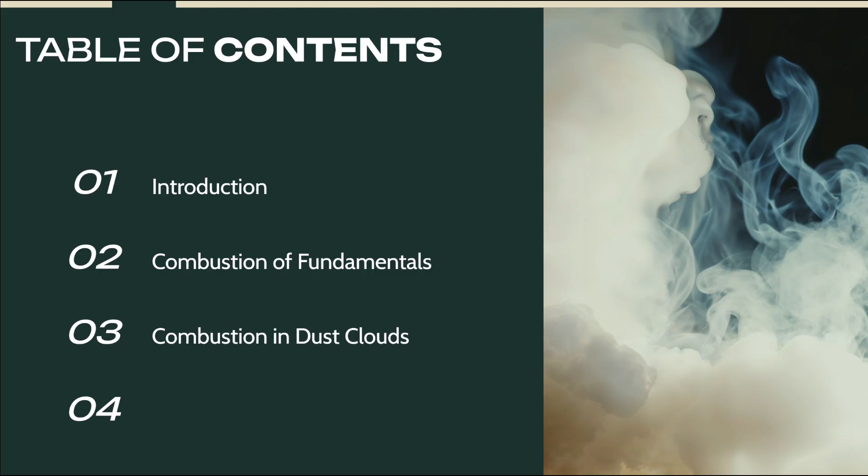Fine powders, also known as combustible dusts, can ignite or even explode when dispersed in air under the right conditions. These risks arise because fine particles have a large surface area relative to their volume, allowing them to react rapidly with oxygen. Dust explosions have caused serious property damage and loss of life across various industries such as food processing, metal fabrication, and chemical manufacturing. Understanding these risks is essential for engineers to ensure safe plant design, hazard prevention, and worker protection.

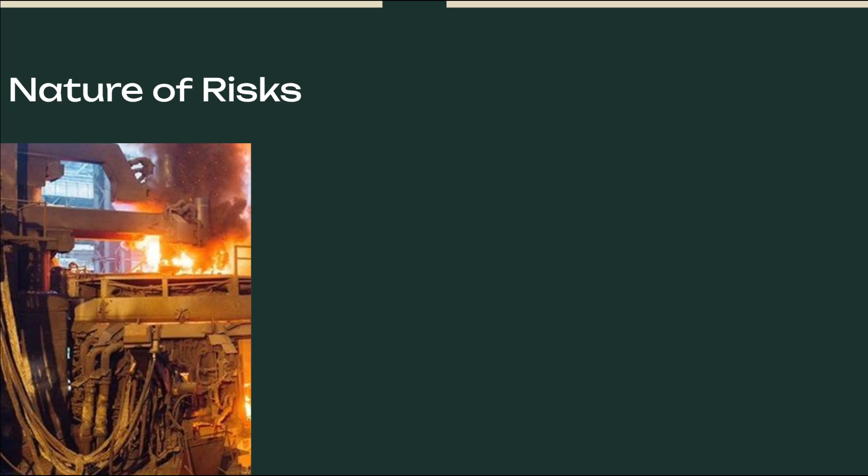The hazards presented by fine powders can be classified into two main risks. Fire, when fine powders can easily ignite because of their large surface area, which allows rapid oxidation when exposed to air. Even a small spark, hot surface, or static discharge can start a fire once the dust is heated above its ignition temperature.

Explosion, when combustible dust becomes suspended in air at the right concentration, it can form a flammable cloud. If ignited, the burning particles release heat and pressure rapidly, leading to a dust explosion that can cause severe damage and secondary blasts.

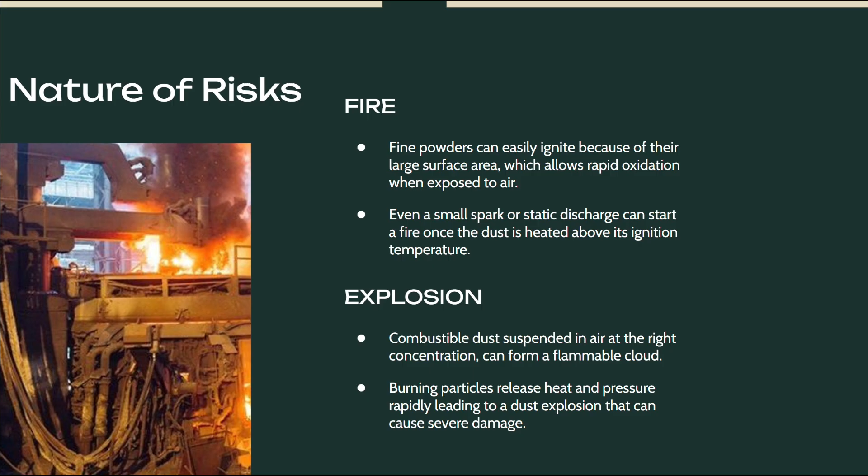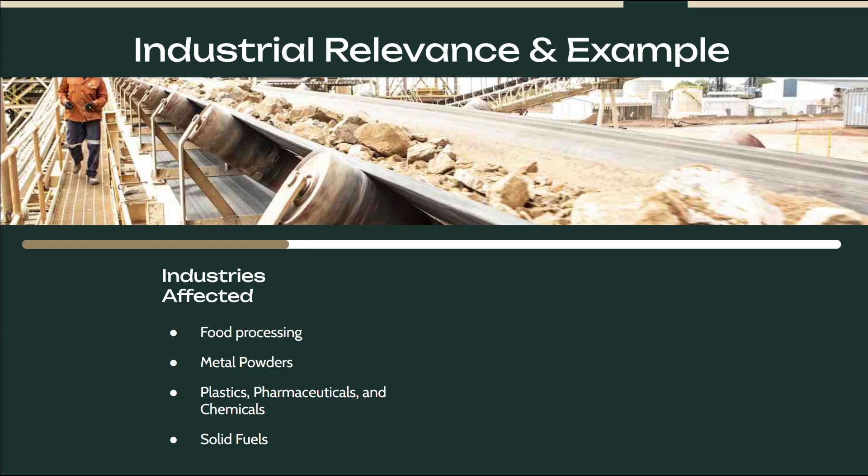Fine powders are commonly handled in many industrial sectors, including food processing such as flour, sugar, and grain handling, metal processing involving aluminum or magnesium powders, plastics and pharmaceutical industries, and energy and chemical plants handling coal or biomass. These processes often involve grinding, drying, conveying, and packaging, which can generate dust clouds and increase explosion potential.

Common ignition sources and equipment include storage silos, dryers, and dust collection systems, conveyor belts, bucket elevators, and mills, and hot surfaces, friction, or electrostatic discharges from machinery. If not properly controlled, these systems can easily create conditions that can lead to ignition and combustion.

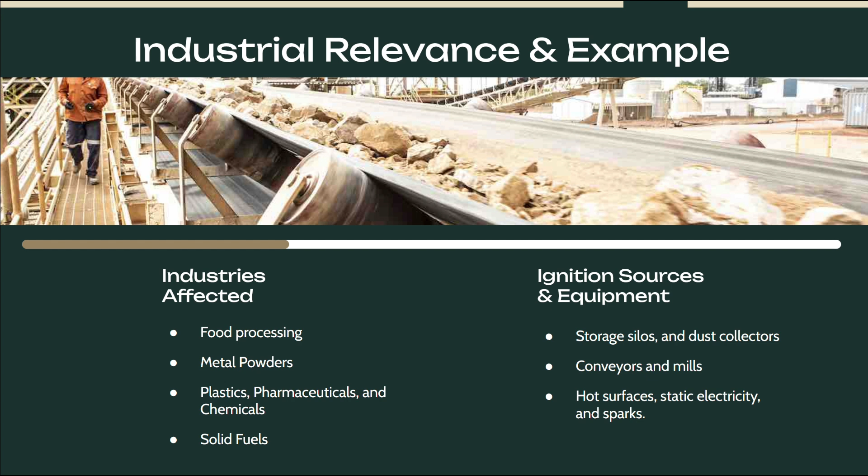A well-documented example is the Imperial Sugar Company explosion in Port Wentworth, Georgia, USA in 2008. In this incident, fine sugar dust accumulated on floors, equipment, and overhead surfaces. When the dust inside an enclosed conveyor came into contact with an overheated bearing, it ignited and caused a primary explosion. This initial blast disturbed more settled dust throughout the facility, leading to massive secondary explosions that destroyed much of the plant. The disaster resulted in 14 deaths and 38 injuries.

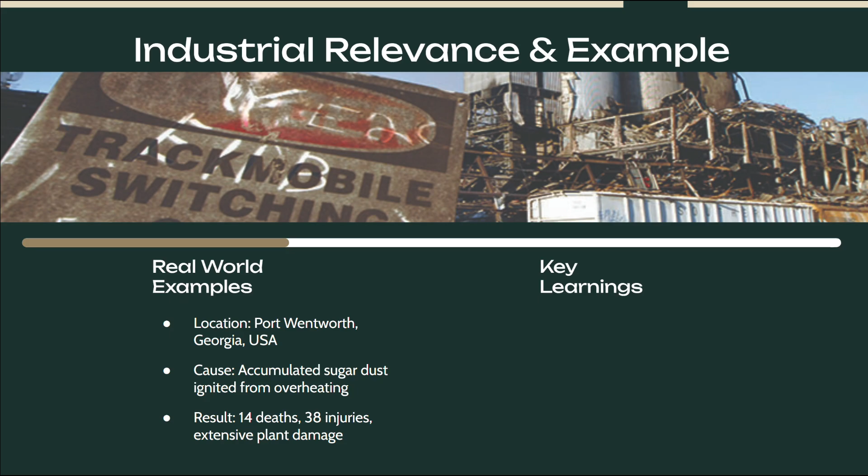Investigations revealed several key issues: poor housekeeping that allowed dust buildup, inadequate ventilation and dust collection systems, poor maintenance of machinery, and lack of worker training and hazard awareness. This tragedy highlighted how small ignition events can rapidly escalate when fine powders accumulate and engineering controls fail.

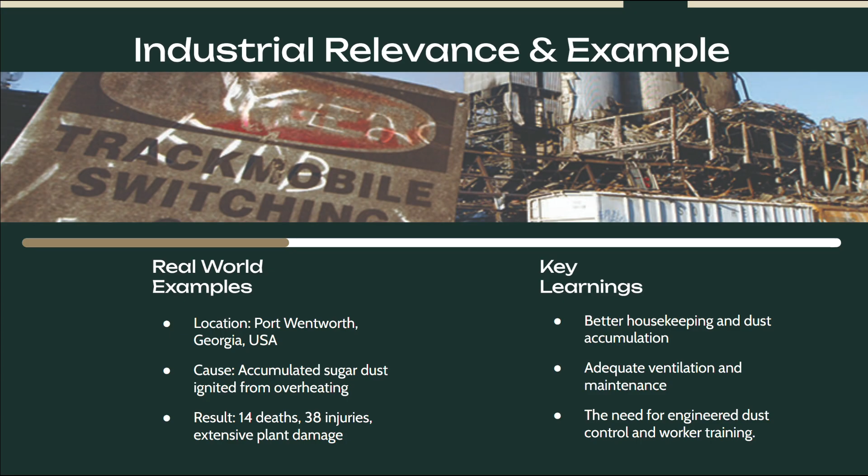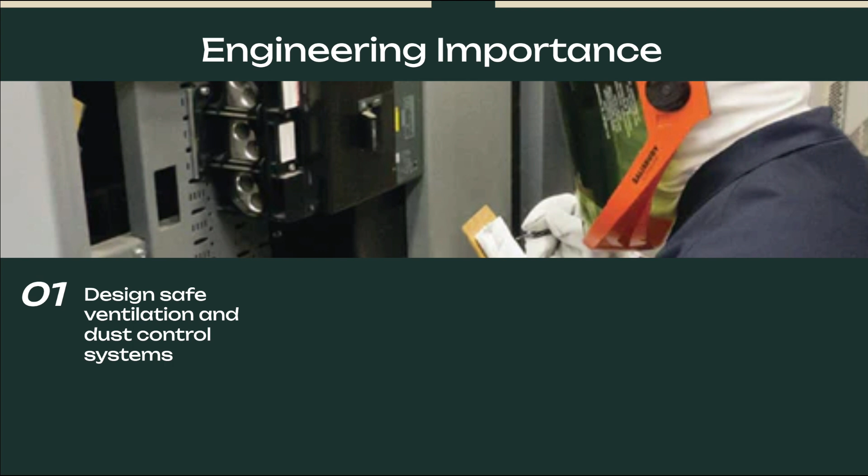From an engineering perspective, understanding and managing dust explosion hazards is critical for process safety. Engineers must design safe systems, including proper dust collection, ventilation, and explosion venting. Implement preventive maintenance, ensuring equipment remains clean, grounded, and free from ignition sources. And provide training so that all personnel understand proper handling, cleaning, and emergency procedures. Following safety standards, such as those from the National Fire Protection Association, helps ensure facilities remain compliant and secure.

By combining good design, maintenance, and safety culture, engineers can effectively prevent dust-related fires and explosions, protecting both people and industrial operations.

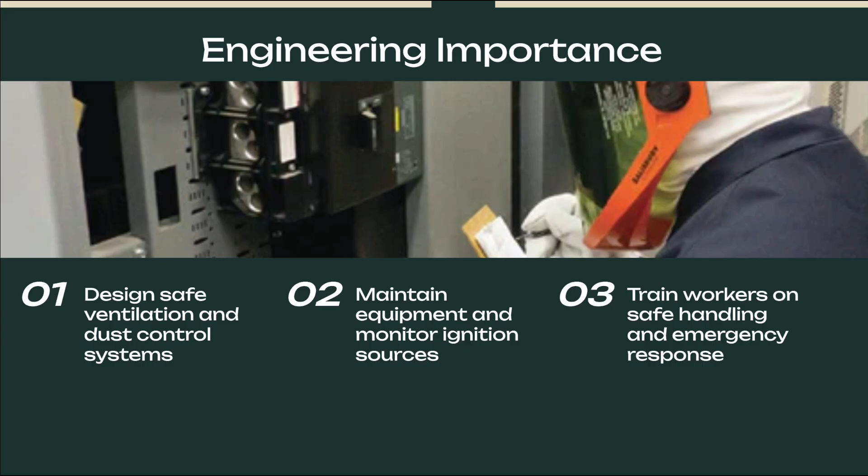Good day. Now that we have learned the dangers of dust explosions, we need to understand the science behind them. We will start with the fundamentals of combustion. We begin with the foundational model called the fire triangle. This heuristic establishes the three stoichiometric and energetic prerequisites for typical combustion: the fuel, the oxidizer, which is usually atmospheric oxygen, and the ignition source to supply the activation energy.

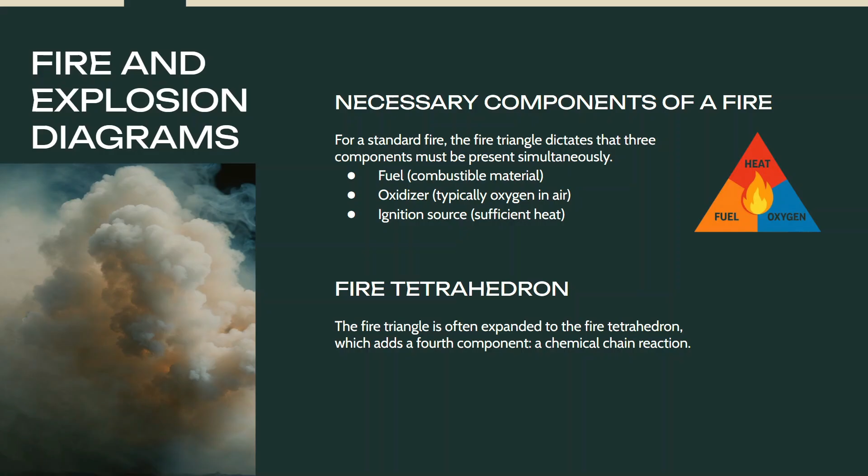For sustained combustion, however, we must use the fire tetrahedron. The fourth component added here is the uninhibited chemical chain reaction. This element represents the continuous production of highly reactive intermediates, specifically free radicals, which sustain the self-propagating exothermic nature of fire. Effective suppression, therefore, can target any of these four components.

When dealing with dust hazards, a new model is required: the dust explosion pentagon. This model integrates the fire triangle with two critical physical parameters that differentiate a rapid combustion event from an explosion. The first is dispersion, which says that solid fuel must be suspended in the oxidant, which is air, at a specific concentration to form a uniform flammable cloud. This dramatically increases the reactive surface area.

Second is confinement, which says that the reaction must be constrained within an enclosure. This confinement is what allows the rapid thermal expansion to translate into a dangerous, destructive pressure wave.

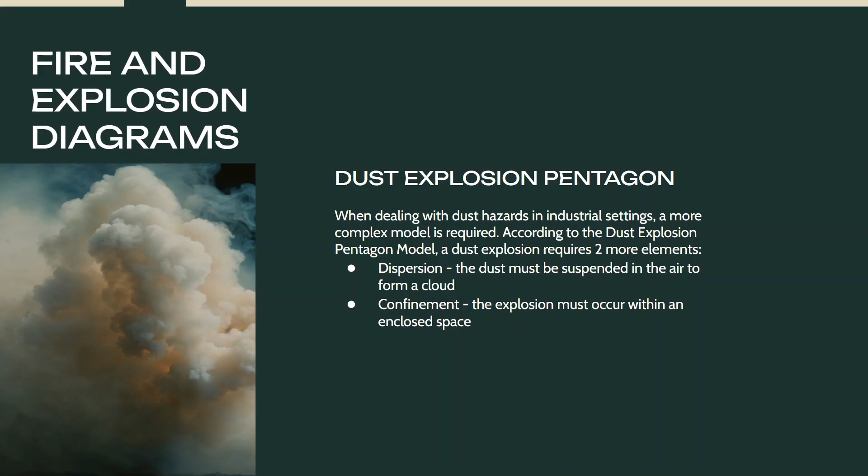Chemically, combustion is defined as an exothermic oxidation process. The general equation for an organic fuel is presented here. The key output is heat, which regenerates the ignition source and sustains the chain reaction.

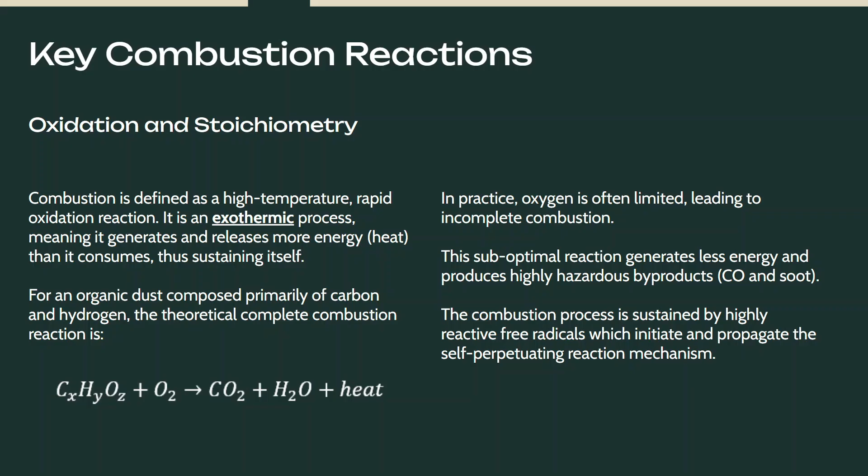It is important to recognize that this is the equation for complete combustion only. In environments with insufficient oxygen, a common scenario in large vessels or dusty systems, incomplete combustion will occur. This results in the formation of hazardous byproducts like carbon monoxide, increasing fire risks and personal safety risk.

The reaction of combustion is bounded by concentration limits. For dusts, we characterize this range using the minimum explosible concentration, or the MEC. The MEC represents the lowest concentration of airborne dust capable of propagating a flame front. If the concentration is well below the MEC, the mixture is too lean to support combustion, while an upper explosible

limit, or UEL, exists for gases. A similar definitive limit is rarely observed for dusts. Instead, a highly concentrated dust cloud simply becomes too rich, where excess dust acts as a thermal sink, absorbing heat and inhibiting the necessary temperature rise.

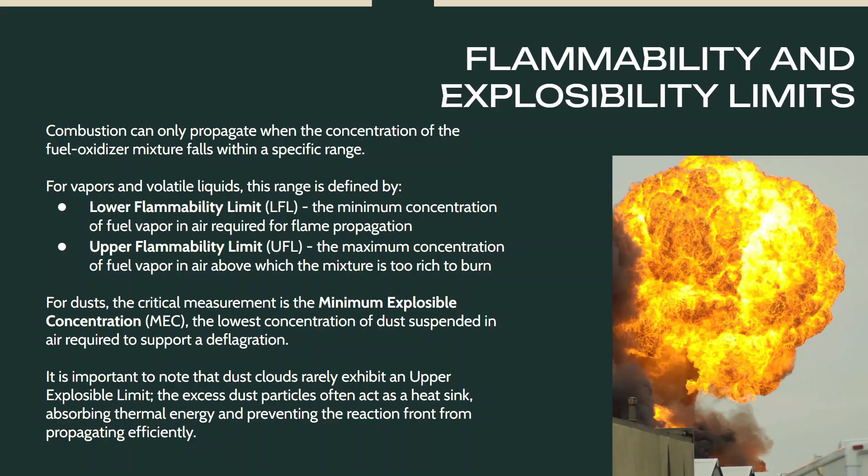The regulatory goal is to ensure continuous operation at a concentration well below the established MEC for the material being handled.

Finally, we need to understand the four main types of ignition sources, which provide the initial heat to start the reaction.

Thermal ignition sources involve any hot surface, with the relevant parameter being the minimum ignition temperature. The surface temperature of any equipment must be maintained below the MIT to prevent ignition through direct contact or convection. Thermal sources include hot surfaces, which can arise from equipment malfunction, sparks, and open flames.

Electrical ignition sources can come from short circuits, faulty wiring, or arcing in electrical contacts. Another major concern is the electrostatic sources. When fine dust moves through machinery, it builds up static electricity.

This energy is measured by the minimum ignition energy, or MIE. Many industrial dusts can be set off by MIEs as low as 15 millijoules, which is less than the static shock you feel when walking across carpet. This makes grounding and bonding equipment absolutely essential to avoid explosions.

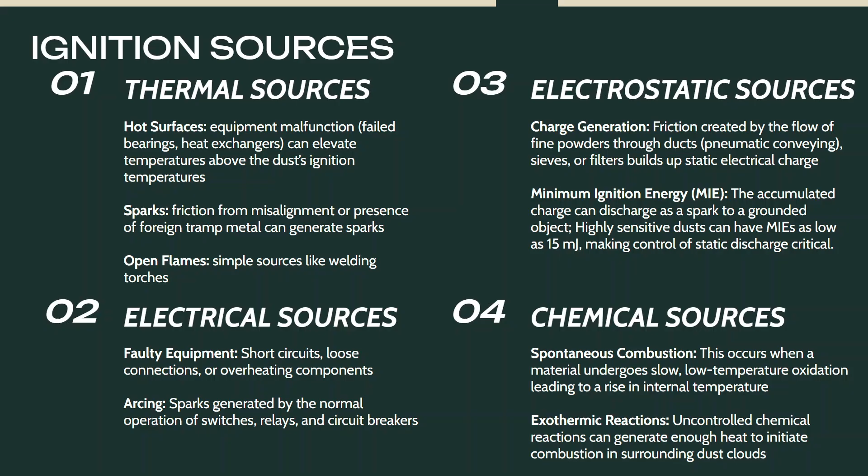Lastly, the primary source of chemical ignition is spontaneous combustion, occurring when certain dusts slowly react with oxygen at low temperatures, causing the material to heat itself up until it ignites. That will be the end for fundamentals of combustion.

Hello everyone, in this part of our presentation, we will explore the combustion in dust clouds, a phenomenon that's critical in understanding dust explosion hazards in industrial processes. Our discussion here will cover the mechanisms of deflagration and detonation, the characteristics of dust explosions, and the apparatus used to determine these parameters. Let's start first with the fundamentals of a dust cloud explosion.

In general, finer combustible particles are more prone to explosion because they more readily form a dispersion with air, have a larger specific surface area, offer a greater surface area for reaction, generate more heat per unit mass, and have a greater heat-up rate. This concept is backed up by principles of chemical kinetics.

As particle size decreases, the rate of heat generation increases, as shown in the equation for heat generation below, where the variable 6/x denotes that the heat generation is inversely proportional to the dust particle size. Or in other words, the smaller the particle, the more intense the combustion. This means that fine powders such as flour, coal dust, or metal dust can heat up and ignite much faster than coarser materials.

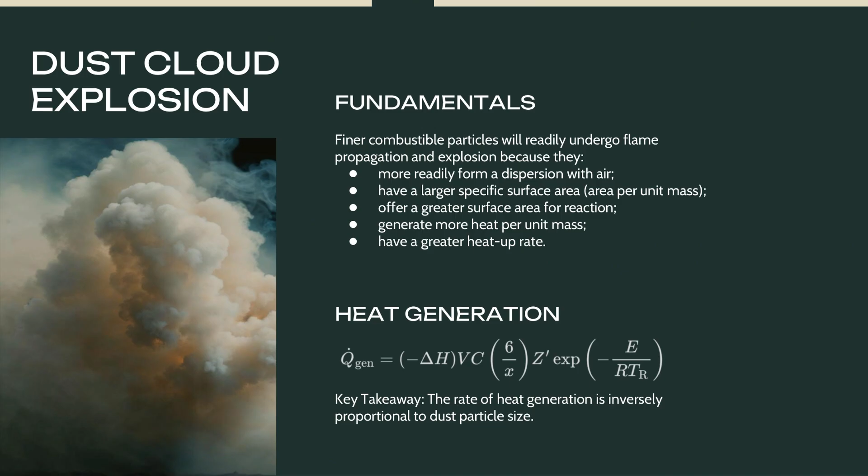To assess how severe a dust explosion can be, several key characteristics are determined experimentally. First, the minimum dust concentration for explosion. This is the minimum explosible concentration or the lower explosion limit - the lowest dust concentration suspended in air that can allow combustion. This is around 20 to 60 grams per cubic meter for common particulates in the industry.

Second is the minimum energy for ignition, which is the lowest spark energy required to start off the explosive reaction. Particulate characteristics set the lower limit of this energy requirement.

Third, the minimum ignition temperature, also called the auto-ignition temperature, is the lowest temperature for spontaneous ignition without any external spark or flame. Fourth is the maximum explosion pressure, which is the peak overpressure generated during the explosive reaction. This is a crucial parameter, as we will see later in designing equipment handling dusts.

Fifth is the maximum rate of pressure rise during an explosion, which indicates the robustness of an explosion. This is, again, used later in designing relief systems or suppressive systems.

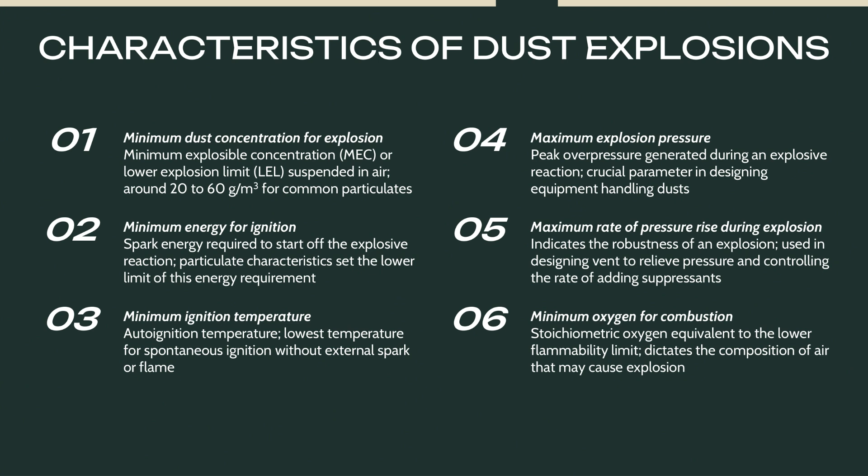Last but not least is the minimum oxygen for combustion, which, as mentioned earlier, is the stoichiometric oxygen requirement related to the lower flammability limit. This dictates the composition of air that may cause explosion. Together, these parameters describe how reactive and hazardous a dust material can be.

Now we look at how combustion progresses once ignition occurs through the mechanisms of dust explosion. In deflagration, it is the rapid subsonic combustion of dust particulates below 344 meters per second, the speed of sound at ambient conditions. This type of reaction is driven by heat and mass transfer. The reaction front moves as particles ignite and release heat to their neighboring region.

Easier ignition occurs when the minimum ignition energy and auto-ignition temperature are low. A higher maximum pressure and a faster rate of pressure buildup make the deflagration stronger and more destructive.

On the other hand, detonation occurs when the combustion front moves at a supersonic speed, greater than 344 meters per second. A shock wave compresses the unburned mixture, creating intense pressure and temperature spikes. Detonation happens only under special conditions, i.e., a dense and confined dust cloud near its optimum concentration.

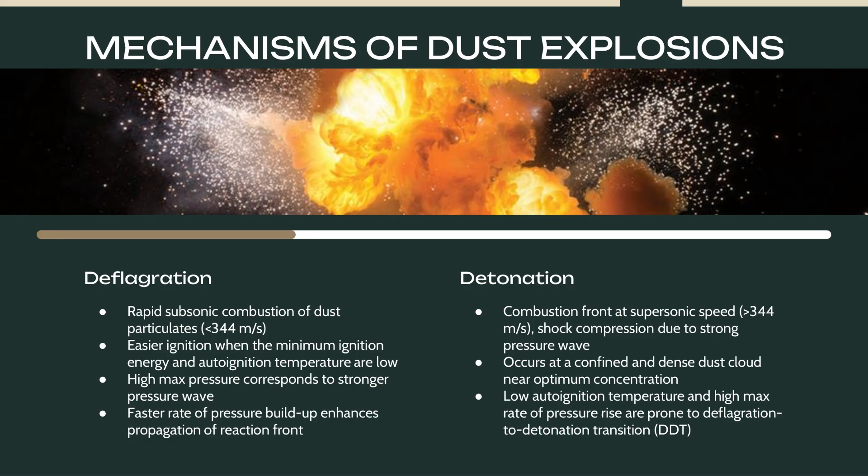When deflagration accelerates to detonation, we call this a deflagration to detonation transition, or DDT, which occurs at low auto-ignition temperature and high max rate of pressure rise.

To obtain the characteristics for dust explosions, laboratory scale test equipment is used. The simplest device is the vertical tube apparatus, consisting of a vertical glass or metal tube with a dispersion cup at the bottom that holds the sample dust. Air is blown through the solenoid valve to disperse the dust into the tube, forming a dust cloud. Ignition can then be provided by either an electrical spark between electrodes or by a heated wire coil. Here shown is the ignition electrode.

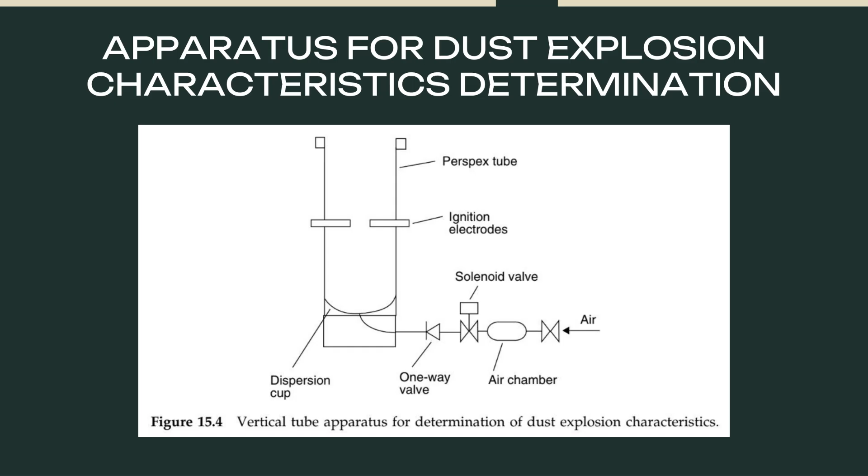This apparatus is mainly used for classification tests and for determining the minimum dust concentration for explosion, the minimum energy for ignition, and in a modified setup, maybe the minimum oxygen concentration for combustion. Although the setup is simple, it is fundamental for identifying whether a dust is explosible at all.

For a more precise and safer explosion experiment, the 20-liter sphere apparatus is used. This device is a spherical pressure vessel equipped with a pressure transducer. The test dust is stored in a small reservoir and is dispersed into the sphere by compressed air through the dispersion ring surrounding the vessel.

The sphere is first evacuated to about 0.4 bar so that when the dust is injected, the pressure rises back to atmospheric pressure. Ignition is achieved using a pyrotechnic igniter, typically rated at 10 kilojoules, placed at the center. Delay between dust dispersion and ignition, about 60 milliseconds, ensures consistent turbulence level, which significantly affects the rate of combustion and the measured pressure rise.

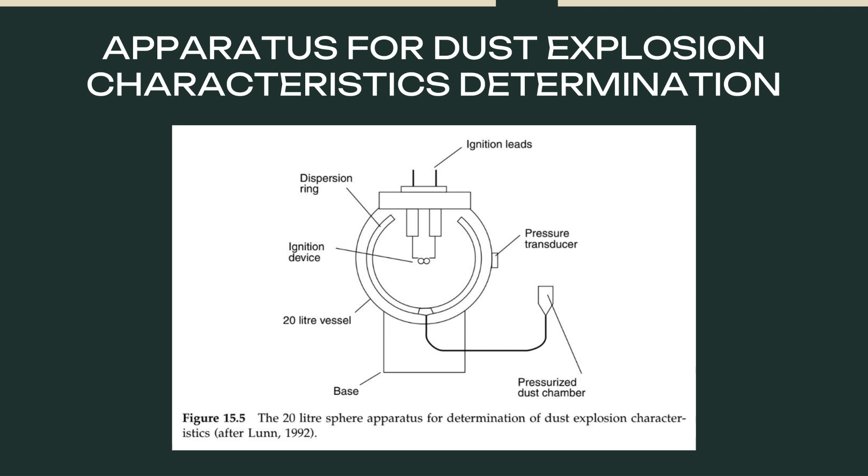From these tests, we determine the maximum explosion pressure and the maximum rate of pressure rise, both of which are critical for designing an explosion protection system. Larger versions, such as the 1 cubic meter sphere, are used for scaling and validating these results.

Finally, let's discuss how these measured characteristics are applied in industries. First, the minimum dust concentration indicates the quantity of air to be used in the processing system for combustible dust. It helps engineers design ventilation and air handling systems that keep dust levels below explosive limits.

Second, the minimum energy for ignition determines whether dust can be ignited by an electrostatic spark as low as 15 millijoules. Third, the minimum ignition temperature dictates the maximum temperature for equipment surfaces in contact with the dust.

Fourth, the maximum explosion pressure, which ranges from 8 to 13 bar, is used to determine the design pressure in vessels and pipes in explosion containment control.

Fifth, the maximum rate of pressure rise during explosion is used in the design of explosion relief. This is related to the volume of the vessel by the equation shown below.

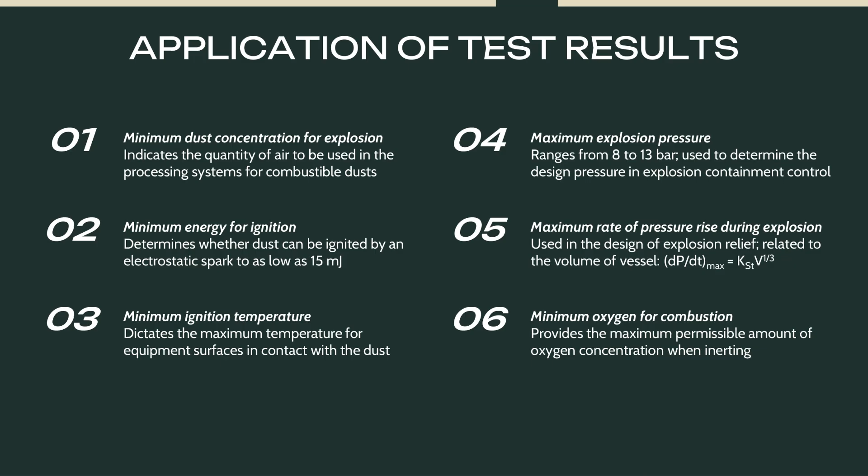Lastly, the minimum oxygen for combustion provides the maximum permissible amount of oxygen concentration when inerting, ensuring the oxygen levels remain too low for combustion to occur. Together, these parameters provide the quantitative foundation for explosion risk assessment and prevention.

Now let's talk about how we actually control hazards from fine powders. Knowing explosions are dangerous is one thing, but preventing them is where engineering comes in. Our goal is either to remove the conditions that allow a fire or explosion, or at least minimize their effect if they occur. We'll look at two main approaches: engineering controls, the physical stuff, and administrative controls, the human and procedural side.

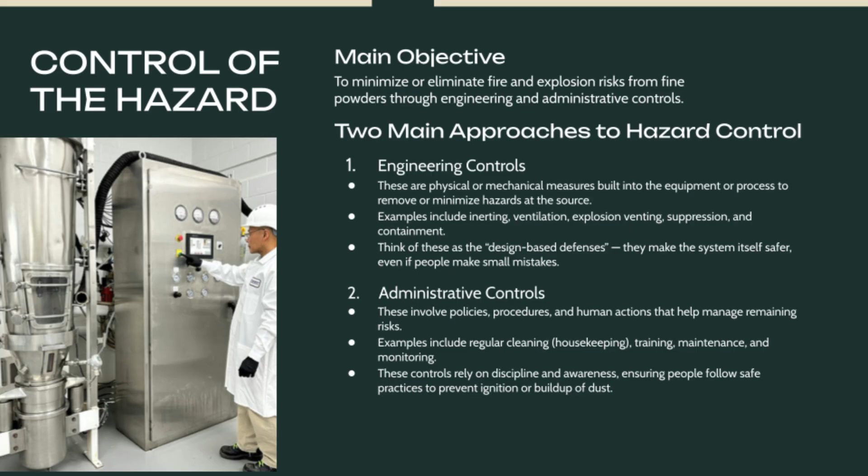First up, inerting. This one's simple but effective. We replace oxygen with an inert gas, like nitrogen or carbon dioxide. Since oxygen feeds combustion, removing it is like taking away the match from the fire triangle. It's commonly used in a closed system like silos or dryers.

Next, ventilation. We can't always make everything airtight, so we use airflow to dilute dust concentration below explosive limits. Think of it like giving the dust particles too much personal space to cause trouble.

And finally, containment and segregation. We use sealed equipment and physical barriers to keep combustible dust and ignition sources far apart.

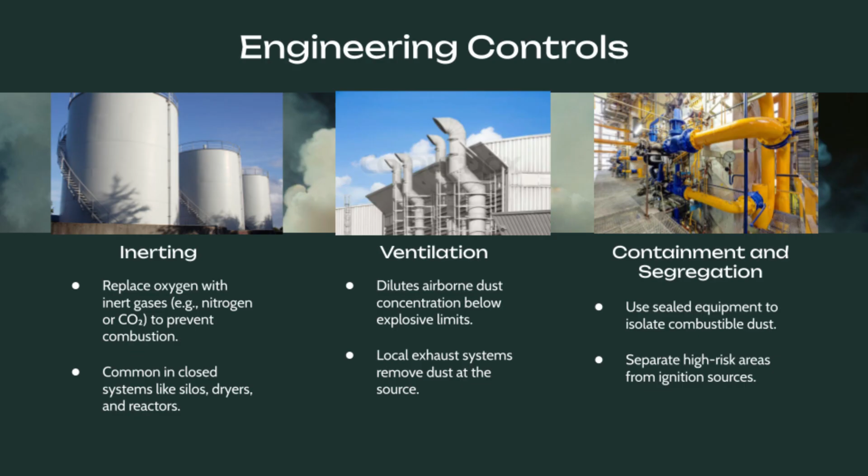Now, just in case everything else fails, because sometimes Murphy's law loves engineering, we have explosion protection systems. First, explosion venting. These are panels that open during an explosion to safely release pressure, letting the system breathe out instead of blowing up.

Second, explosion suppression. Here, sensors detect a rapid rise in pressure and immediately release a suppressant, like CO2 or fine powders, to stop the flame in milliseconds, faster than you can say kaboom.

Lastly, explosion isolation. This stops the flame from traveling through ducts or pipelines to other equipment. Think of it as closing the doors before the fire can spread.

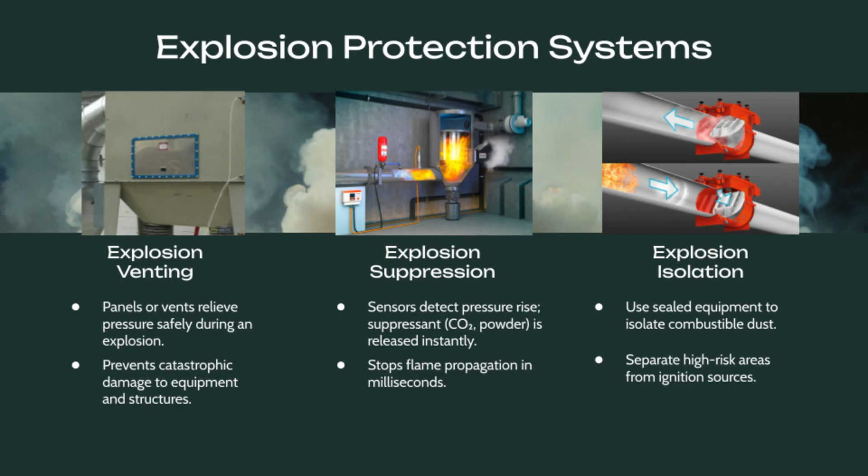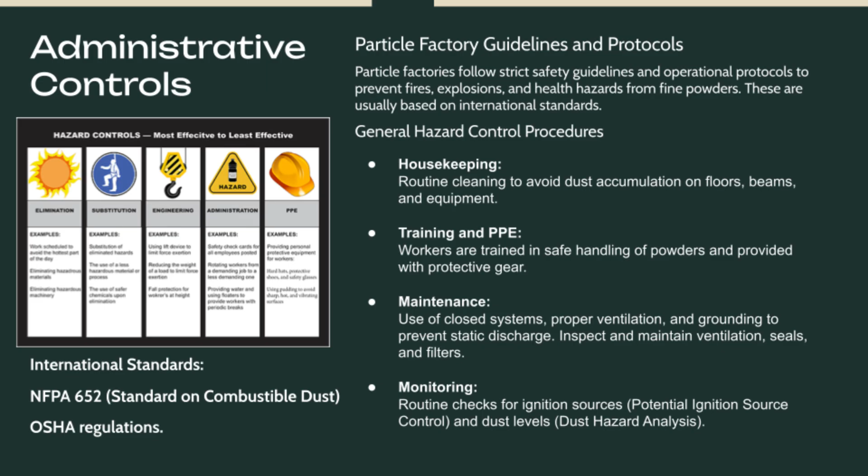And lastly, monitoring. Routine checks for ignition sources, dust levels, and ventilation efficiency. Because safety isn't a one-time setup, it is a continuous habit.

To wrap up, controlling hazards in fine powders isn't just about avoiding explosion, it's about designing smart systems and responsible behaviors. We combine engineering controls to prevent or limit incidents, and administrative controls to ensure people don't accidentally invite disasters back in. In short, keep oxygen out, dust down, and workers trained, and your facility stays in one piece. That's a win for everyone.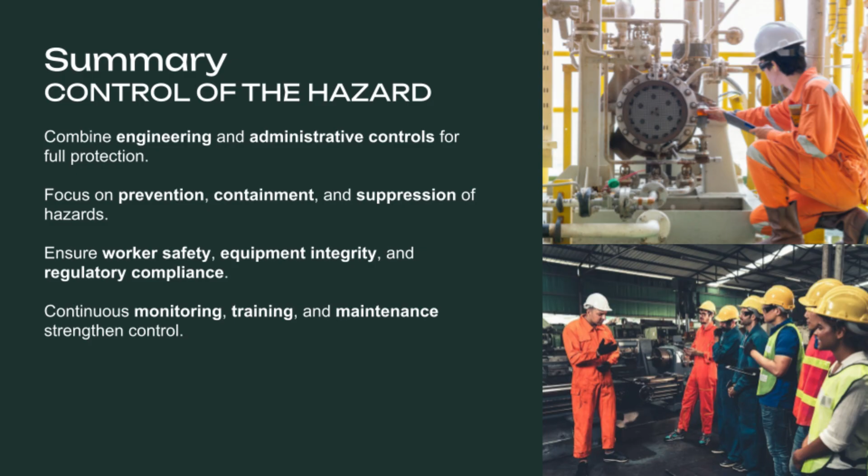So to bring everyone together, we journeyed from understanding why fine powders can be dangerous, to how and when they ignite, and finally what we can do to keep them under control. We started with the introduction, where we saw that even the tiniest powder particle can become a big hazard under the right, or rather the wrong, conditions.

Then we explored combustion fundamentals, learning how fire needs fuel, oxygen, and an ignition source, a trio that we engineers try our best to break up. Next came combustion in dust clouds, where we saw how those tiny airborne particles can turn an ordinary space into a fireworks show no one asked for.

And finally, we wrap up with the control of the hazards using engineering and administrative measures to prevent, contain, or suppress explosions before they turn into catastrophic events.

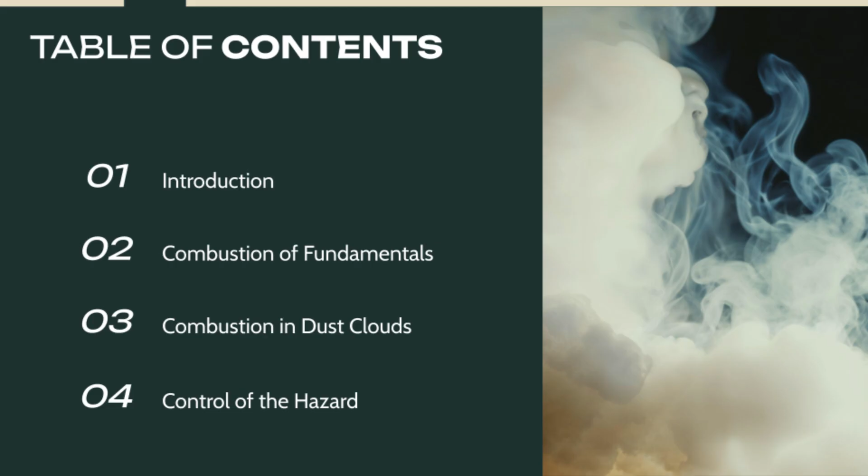In essence, understanding the fire and explosion hazards in powders isn't just about safety, it's about respect. Respect for the science, for the systems we build, and for the people who work with them. So, as we move forward in engineering practices, let's remember, safety isn't the absence of accidents, it's the presence of awareness, preparation, and a little bit of common sense.